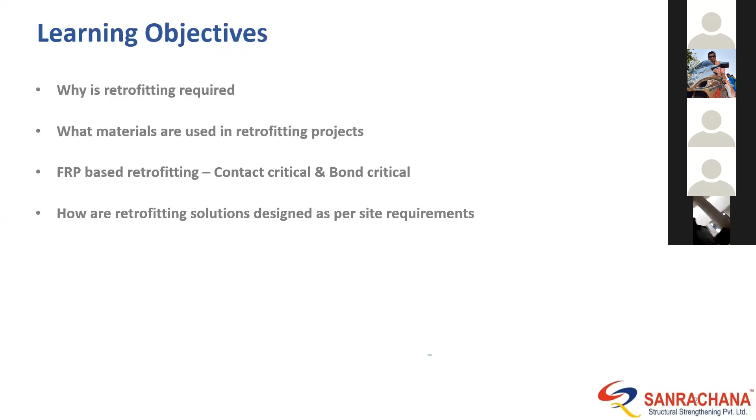So today I intend to present a short presentation about the latest trends in structural repairs and retrofitting which we follow in India. Let me start with the basic learning objectives that we intend through this presentation. We will learn why retrofitting is required, when I'm talking about structural retrofitting, and what materials are typically used in our retrofitting projects in India.

FRP-based retrofitting, we will learn about contact critical and bond critical applications, and how retrofitting solutions are designed for particular site requirements. We will look into some sample design calculations, as well as a few case studies of retrofitting projects. So let's jump directly into why retrofitting is required: change in use. What is change in use? When a structure was once built for a given purpose, and then the purpose of that building changes, like a residential part of a residential complex becoming a commercial setup.

So new additional loading, which was originally not intended to act on that particular structure, occurs when the purpose of the building is changing. In that case, the amount of loading that appears on the building changes, which it was not originally designed for. So in those cases, we need strengthening of the building - that is change in use. When new equipment is added or seismic retrofitting is required, as seismic load was not originally considered, but now we need to consider it to comply with design codes, etc.

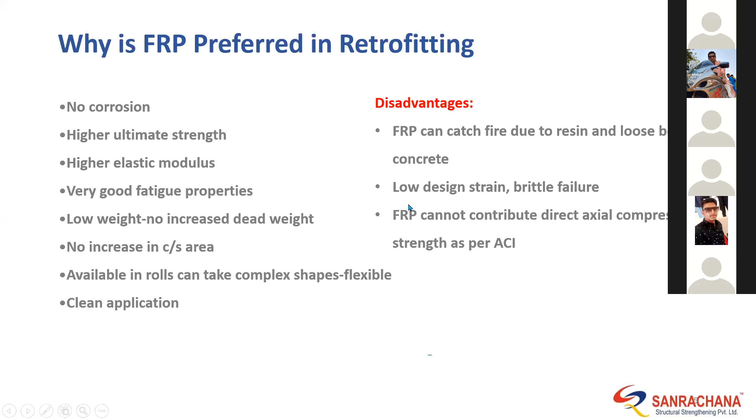We will look into this in detail in further slides. Basically, what is FRP made of? It has a fiber phase as well as a matrix phase.

What is a fiber phase? The fiber phase is the strength provider of FRP. It could be carbon, aramid, glass, Kevlar, boron, etc. There are pitch and PAN fibers in carbon fiber, and depending on whether we need high elastic modulus or high strength, you can select pitch or PAN.

Similarly with glass fiber. Now coming to the matrix phase, you have thermosetting resin and thermoplastic resin, which is also selected based on the type of application.

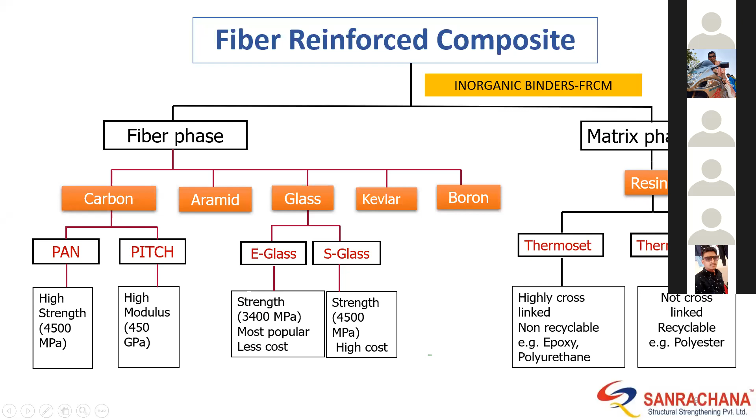Before we go into this, I would like to appear in the video so that I can show you a few things.

This is carbon fiber laminate. Okay, this is how it appears, with fibers oriented along one direction, more clear this way. Yeah, carbon fiber, and this is the thickness. You can see it is quite thin.

You have glass fiber laminate that looks like this. The color is so because of the epoxy used for setting. This is also glass fiber laminate, but with a different resin used at the factory curing stage. All of these have fibers oriented along one direction, so you can see the grain pattern along one direction. These are laminates.

Now there are carbon fibers, carbon fiber wrap that I was talking to you about. This is how it looks, basically like a fabric, very flexible. This has fibers oriented along one direction, so it's a UD fiber. We use it typically for shear strengthening, sometimes for even flexural strengthening. We will see how it is applied that way.

These are categorized based on their weight, as in the count of number of fibers, categorized based on its GSM capacity, that is grams per square meter. So the higher the GSM, the more fibers you get. This is basically a 600 GSM carbon fiber, and this is 900 GSM, which is a little bit thicker. You may not be able to see, but to feel it is thicker.

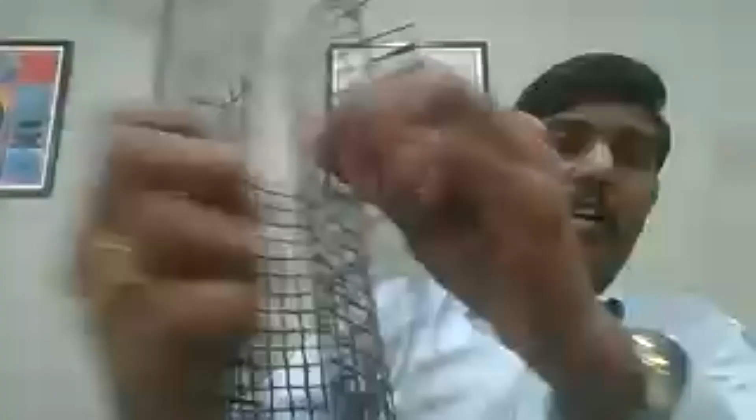And we also have certain things like this. This is used along with a special cementitious matrix. So this is a mesh of carbon fiber, bidirectional, with fibers in both directions. This is basically the strength provider of a product called FRCM, fiber reinforced cementitious matrix. You apply this onto the structure as per the design, and then fix it permanently using specially designed mortars.

We also have carbon fiber rods. This is how they look like, this is a carbon fiber rod, this is a glass fiber rod. Typically carbon fiber rods will be black in color because carbon is black in this fiber form, though of course diamond is also carbon, which is colorless. This is glass fiber, and the color can vary based on the epoxy used. These sound like ceramic. This is how it is.

So this is one typical project wherein we have done FRP strengthening.

This is the bridge which is across the river, and there are several piers which are deficient in shear. These are like 2.3 meter by 1.9 meter cross section, huge piers. You can see the size of the pier with respect to the 4-lane highway.

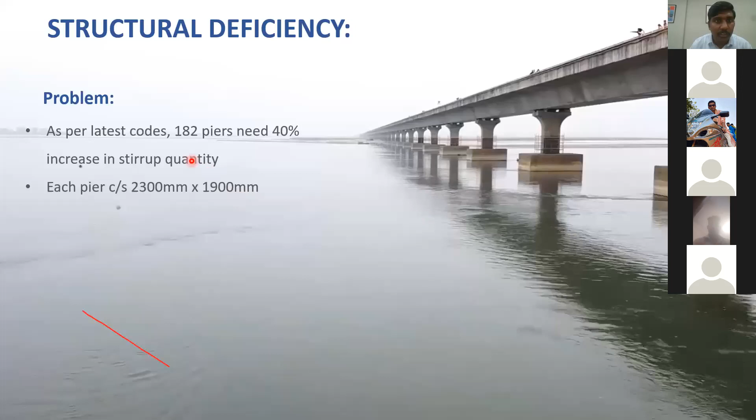This was initially not designed as per the seismic requirement, but later on we needed to comply with the seismic code. The builder was required to make it comply. Because of this, the cross-sectional area, the number of stirrups provided at the construction phase was less as compared to what is required as per the earthquake seismic code. So for that, we designed the carbon fiber wrapping for increasing the shear strength of the section.

So this is how we did it. You can see a roll of carbon fiber here. This equipment on the right is called a wet layup machine. You have an FRP wrap, an FRP roll here, it gets dipped into the epoxy resin, comes out fully saturated and becomes a saturated roll of FRP, and this goes into direct application. So that is a wet layup machine.

So basically the design is like this. You have the pier here, and just a second, let me erase this.

Okay, I cannot erase that. Okay, ignore this red line.

All right, so you have this column, you have this pier. Basically, we are increasing the shear strength. So we have this fiber, it is unidirectional, the fiber length. Along the length of the roll, you have the fibers. So this is the direction, green shows the direction of fibers.

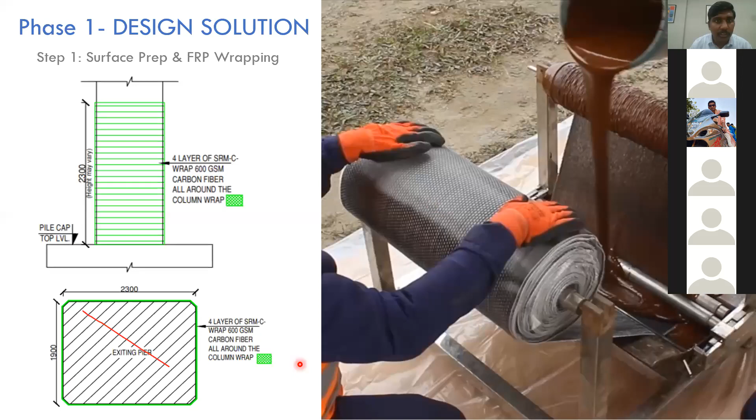carbon fiber all around the column, what you need to do is protect the FRP. Because it's a river, there are a lot of floating objects coming from the river, and it will directly come and impact the FRP, and it will damage the fibers. Then it is of no use. So for that,

you paste washed silica sand on top of the surface of the FRP like this. You can see, and this is for providing the grip. Grip into what? Because we are doing microconcreting. So we have a 40 thickness microconcrete, which you can see is being poured into the pier. So for the microconcrete to have a bond with the FRP that is inside, you applied the previous sand layer.

This is for shear strengthening of this project. And we had to see, basically, site execution is more difficult than how we assume.

In this particular site, the daylight hours are very limited. The temperature is low. The amount of rainfall that happens based on the rainy season, you need to plan your retrofitting activity, because once it starts raining, the height of water in the river will be quite high, and you would not be able to do any retrofitting on the pier because it will be submerged. So all this gave us ultimately a 2 month window in a year. We could only do the retrofitting work for 2 months in a year for this particular project.

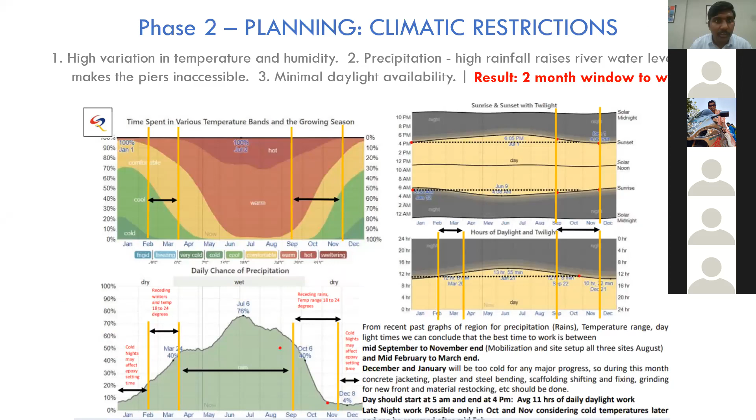So that was the planning. I told you, right, the piers will get submerged. So you cannot do FRP wrapping on a submerged river, right? So this is what it is.

Now, logistics. This particular project was running during the COVID times. So a lot of precautions needed to be taken, regular health checkup, everything. And it was in a very remote location, so shifting had to be done in these boats, which we have never done before this way.

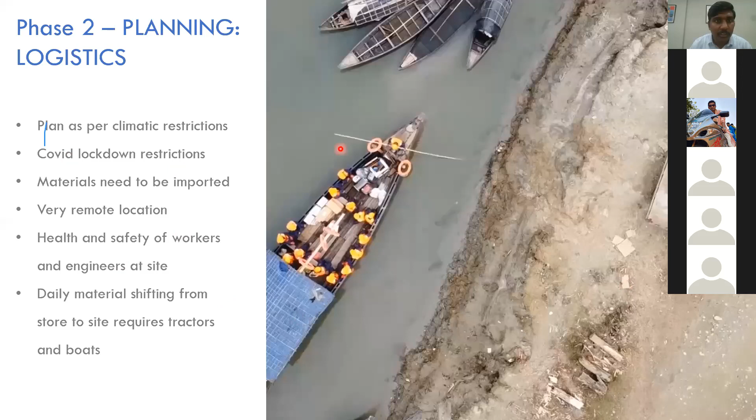Usually when retrofitting happens in the rivers, it will be dried up. But for this river, it's a perennial river, it's always having water in it, and we have to see where the airport is, where the roadways lead to, etc., so that we can shift our material. So remote locations, it's always very difficult.

And again, we need an experimental validation to show the clients, the owner of the bridge, that the FRP wrapping will provide the sufficient strength. So this is how the test setup was done.

Testing us, they wanted to correlate the increase in compressive strength due to FRP wrapping to select which kind of FRP, which company's FRP they wanted. So this is cylindrical. This test was done in one of the labs of a reputed college in Bangalore, in Bombay, and an RCC cylinder of the same grade of the pier was cast.

28 days ke baad, after 28 days, FRP wrapping was performed. These strain gauges were connected to that, and then LVDT is connected to it. And we tested several different samples like this in the same configuration, and also without FRP.

So this is a stress strain curve that you're seeing. Strain on the horizontal side and stress on the vertical side. So up to the strain of 0.01, the FRP wrapped concrete was performing, and it was going further. The curve was extending still further, and you can see that it was reaching M70, I think 70 MPa strength, 100 MPa strength, etc.

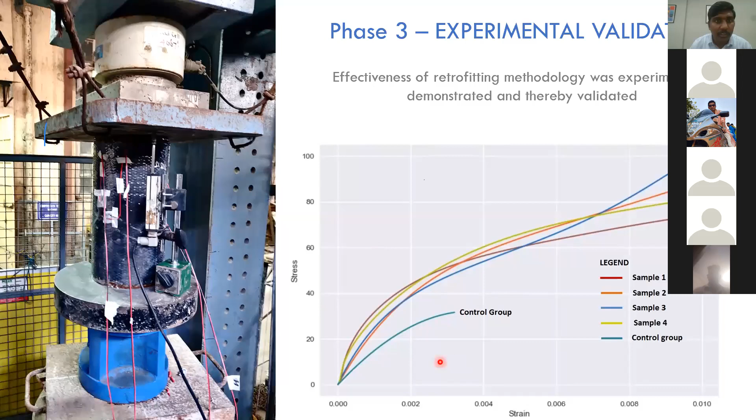And after this, you can see 250,000 square feet, so that is 23,000 square meters of FRP was used, which is a huge quantity used in this project.

And here I can show you a video of how it was done. Let me...

A land of breathtaking scenic beauty, plenteous floras and faunas, plantations, undulating plains, fertile valleys, and mighty waterways. Our retrofitting project is set in this beautiful landscape.

This elevated carriageway is an all-weather access passage across the unforgiving terrain beneath it. The carriageway is also a lifeline to the socio-economic development of several states.

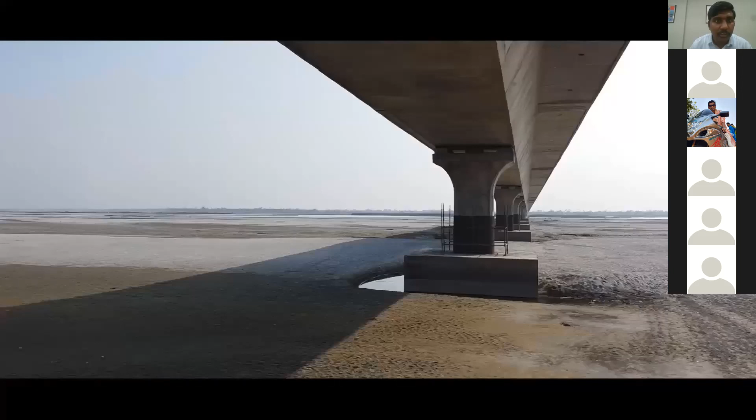However, a precautionary structural due diligence by the new owner revealed a red flag. The piers did not comply with the current seismic standards, and the asset location falls under earthquake zone 5, the most dangerous zone of all.

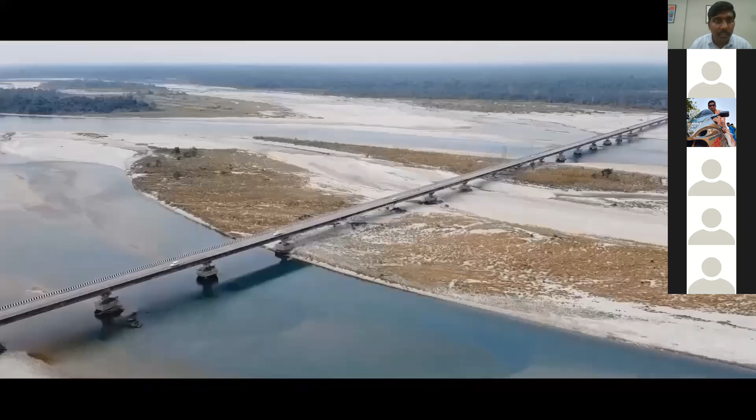Earthquakes have destroyed even our extraordinary structures. The future of this asset had to be secured from such eventualities. This task was awarded to Sanrachna.

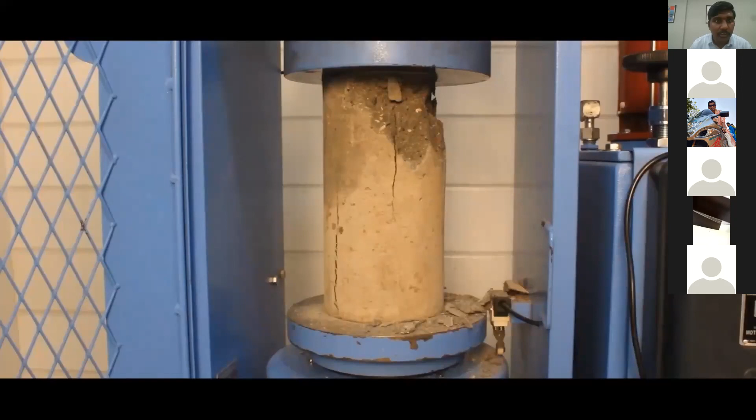At Sanrachna, our innovative structural design team and well-experienced site execution team work hand in hand to deliver custom-built turnkey solutions to your structural strengthening and repairing requirements with full load testing. In this project, we enhance the structural performance of the piers with carbon fiber confinement.

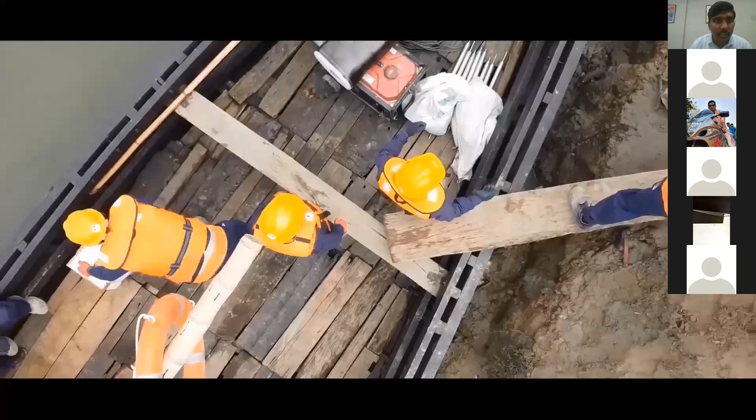Here we see carbon fiber being shifted to the piers of the bridge. Carbon fiber FRP is a space-age, high-performance material. Compared to traditional repair techniques, FRP gives tremendous speed of execution and imparts ductility for tackling seismic forces. 250,000 square feet of carbon fiber was applied in this project.

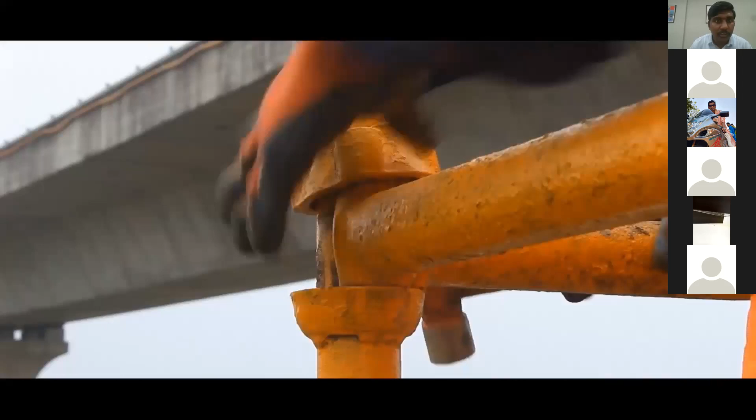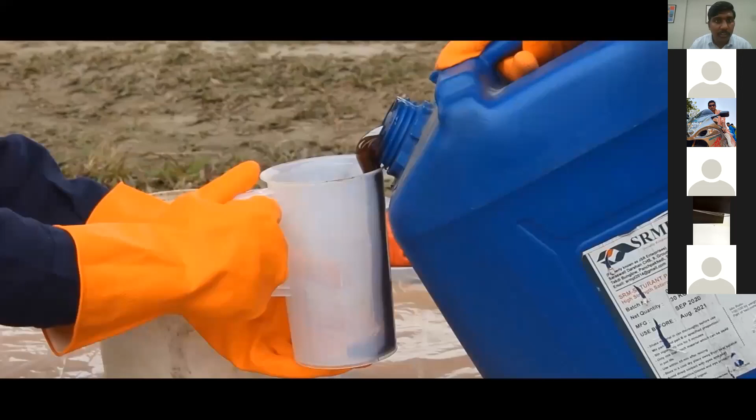After erection and checking of scaffolding, the workforce begins the surface preparation work, following which the primer and putty application is done. The saturant is then proportioned, mixed, and poured into the wet layup machine, where it saturates the carbon fiber sheet. Wet layup increases the productivity, pace, and quality.

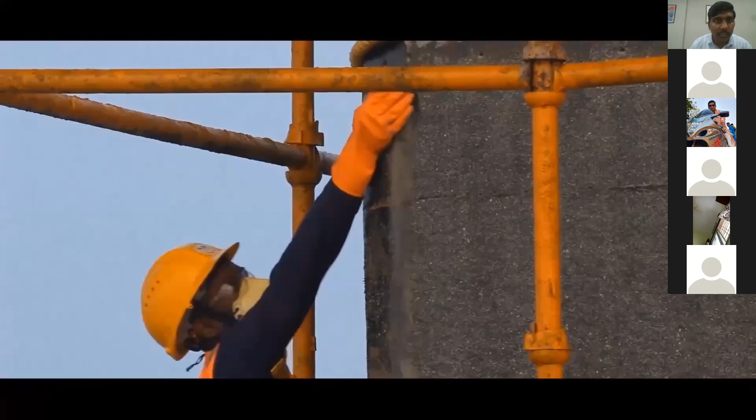Before doing the protective RCC jacketing, sand pasting is done to improve its bonding. Suspended silt and floating objects in the river constantly impact the piers. We must protect the FRP from erosion and damage.

Using the lightweight FRP formwork, a 40 mm thick micro-concrete jacket would be cast with nominal reinforcement. With rebars tied and formworks firmly supported, pouring can begin from the deck to the pier under gravity.

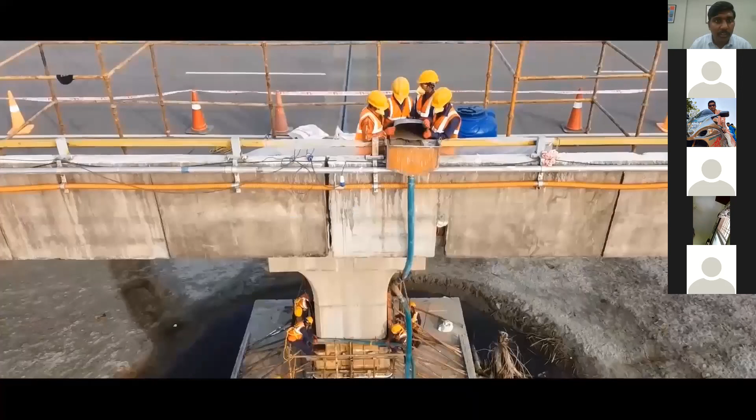And the process goes on. Time-bound completion means meticulous planning and coordination at site, based on temperature, the flow of river, rainfall, daylight hours, and resources.

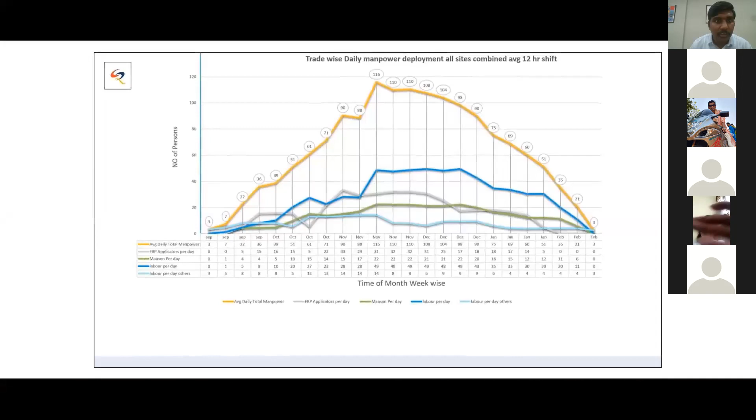Under strict safety measures of COVID-19, our focused workforce gracefully worked their way around the adversities, and with their dedication, the beautiful bridge is now revived and ready to face the challenges of the future. Sanrachana, leaders in structural retrofitting.

So basically, in that project, we had a deficiency in the shear strength of the piers. Stirrup quantity was less than what is required, and the solution we did was FRP wrapping using an epoxy-based saturant.

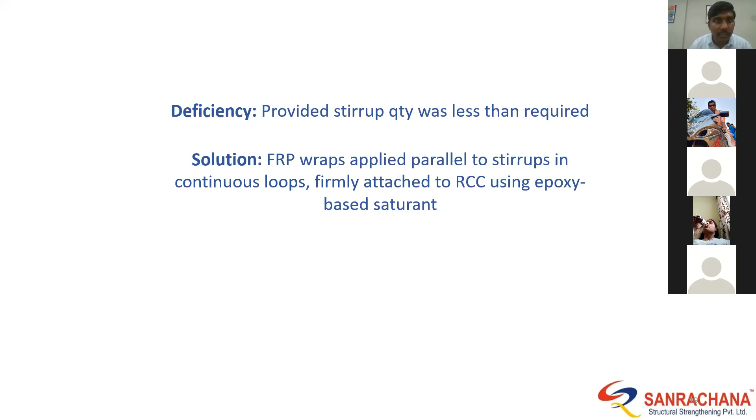Now the question arises: how important is this FRP to RCC bond? Because RCC is a weak member and FRP is the strength provider, it seems like the bond between this FRP and this RCC is through which all the strength transfer happens. Now, how important is this FRP RCC bond?

To answer that question, we need to know what is a bond critical and contact critical application. This is the textbook definition for bond critical application, wherein we require flexural and shear strengthening of beams, slabs, columns, or shear walls. We require this adhesive bond between the FRP and the concrete.

It seems like through common sense, this bond is quite important in all types of FRP applications. However, that's not the case. There are certain contact critical applications wherein the only critical element is the contact between the FRP and the concrete. There is no need of bond for this particular type of application, called contact critical application.

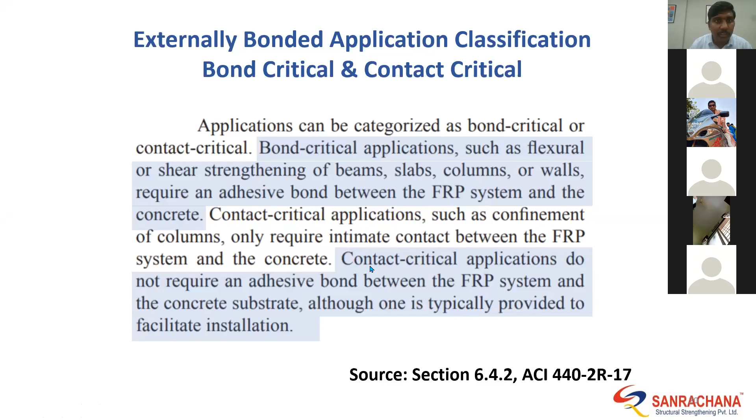What are they? This is an example of a contact critical application, where the only critical thing is the contact, not the bond.

So what happens is that the column, when it is under axial compression, has a little bit of lateral expansion, right?

You know about the Poisson's ratio and all. So because of the lateral expansion, these fibers that are in the hoop direction, along the circumferential direction, when under this lateral expansion of concrete, resist this lateral expansion. Because they are in a circle, and you are trying to make the circle larger by applying compression, those fibers resist this lateral expansion of concrete, and thereby increase the strength of the concrete.

Basically, if it is not a circular cross section, this hoop directional strengthening will not increase its compressive capacity much. However, it will increase its shear capacity. So in case of shear, the bond is critical. But if you are applying it for increasing compressive strength, then the bond is not critical. We only have to make sure that this contact remains intimate without any air bubbles in between.

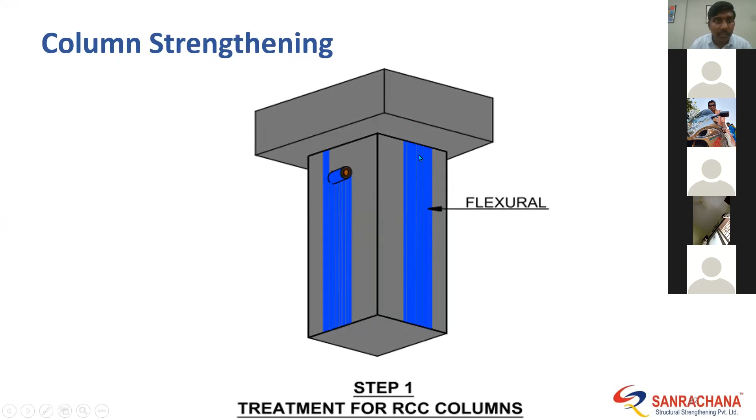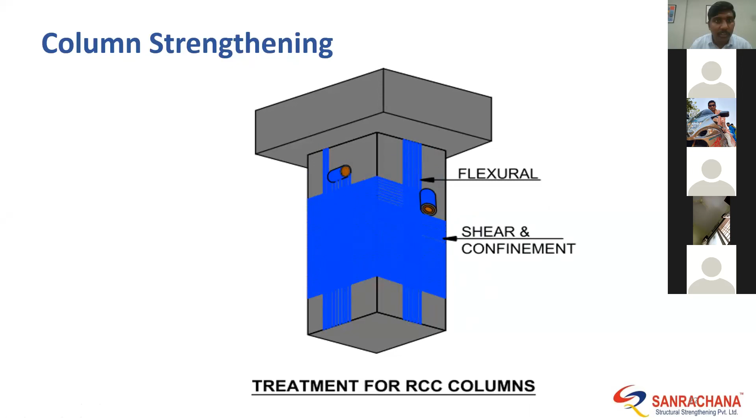So typically, this is how we do the column strengthening. When the column behaves as a beam, under flexure, combined axial force and moment, in that case it will act as a beam. So to resist the tension side of bending, you apply FRP as flexural reinforcement in the column, and then for shear requirement, this is how you apply it. Combined, this is how it will look: flexural and shear strengthening, or confinement. This is the FRP application direction as per theory, and this is how it is in practice as well.

So doing this increases the compressive strength, is what the code says, and it is proved as well in the previous graph that I showed you. In the experiment, you had seen, the higher M35 concrete was going up to M100.

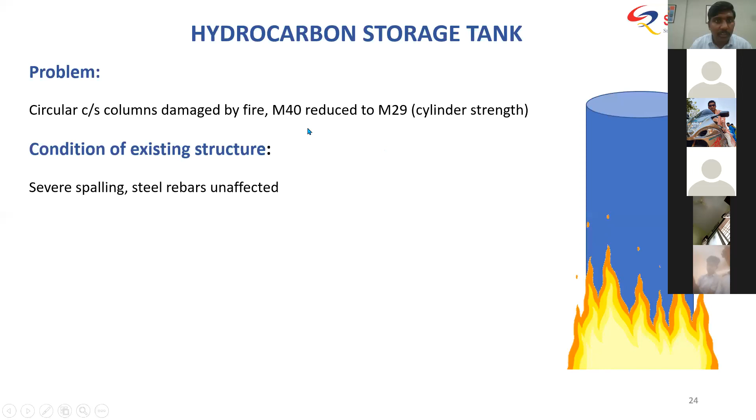They had done the non-destructive testing, which is called NDT. Based on the tests, ultimately the consultant found that the strength of steel rebars were not affected, because enough concrete cover was there at the time of design itself. So only the spalling of concrete had happened, and the core concrete strength had somewhat reduced. The least strength observed was M29. So on the safer side, we said all the columns are M29 currently, and we need to bring it to M40.

Restoration of concrete strength alone is sufficient in this particular case. So what do we do? Repair the column profile with a high strength adhesive putty, an M50 grade adhesive putty, which was applied to the spalled areas so that you regain the circular cross section. When there is spalling, the circular part gets aberrated, it doesn't stay smooth. So to smoothen it out and bring in proper cross section with a strong material, you use the high strength M50 grade adhesive putty, and then confine it with carbon fiber FRP.

This is the design calculation. I'm not going into the details of design, I'll just show you the specifics to make you understand the factors involved. There is CE, which is an environmental reduction factor. You basically reduce the strength of the FRP by this much - 4,900 MPa is the maximum ultimate fiber strength, which you reduce by a factor of 0.85 to reach 4,165.

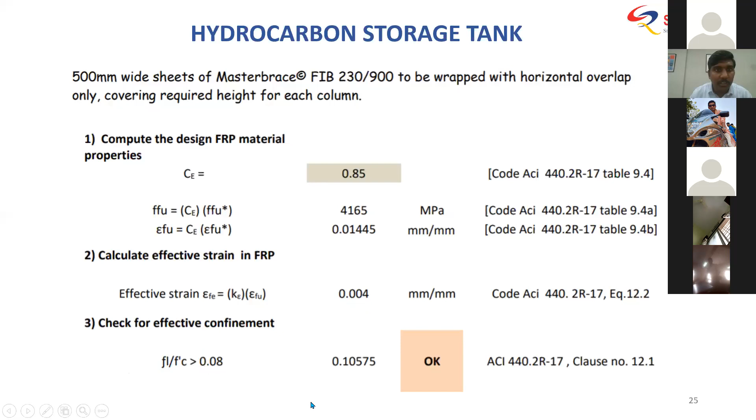Then you have kappa B, which is a shape factor - for circular columns it is 1. Epsilon CCU is the maximum compressive strain, which has to be limited below 0.01. As per our calculation, we were getting up to 0.0065, which is where we limit the FRP's strength providing capacity.

Then there's another reduction factor, psi F. For circular sections, we take it as 1. FCC dash is the ultimate strength of the wrapped concrete.

Now, after application of the FRP, how much is the compressive strength of concrete? We found that after 4 FRP wraps, it came up to 39.12 MPa from 29 MPa.

We submitted the calculation to the clients and they certified it. We don't really need to go up to 40 MPa - as per the structural analysis, 39 MPa is well enough, well within safety limits. That is how this particular project was designed, later approved, and went on to site application.

In the horizontal direction of application, the overlap required is calculated using a particular formula given in the ACI code, calculated as 300 mm overlap. So these are the design details - I'm just giving you a brief idea of how it is done.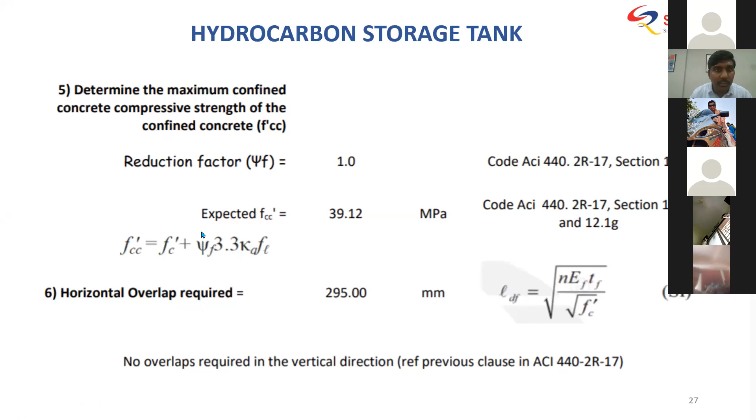So you can see how much factor of safety is there in the design of FRP. Your material is capable of much more, but you are only allowing 920 MPa - it's like 4 times. Why is there so much factor of safety? Because FRP ultimately is not a ductile material, which is why a high amount of reserve strength and factor of safety is required.

Here's a graph of stress versus strain of wrapped concrete, FRP strengthened concrete. This is one of the programs I wrote in Python to show the behavior of concrete in FRP wrapped and unwrapped conditions.

This is the bare concrete, the green curve you're seeing - that is M29, it barely reaches the M30 line, so M29 is the maximum strength of the existing concrete. After FRP wrapping, this blue curve is the stress strain performance curve, wherein, as discussed earlier, you have to restrict the strain to 0.0065 as per calculation, and at that point you get around 39 MPa, which was found sufficient for this particular project.

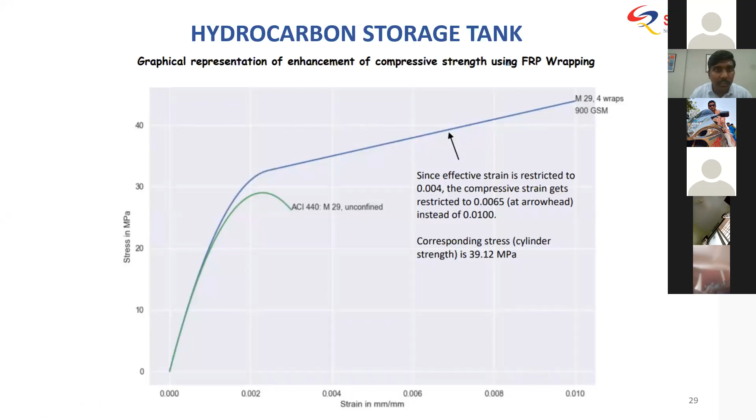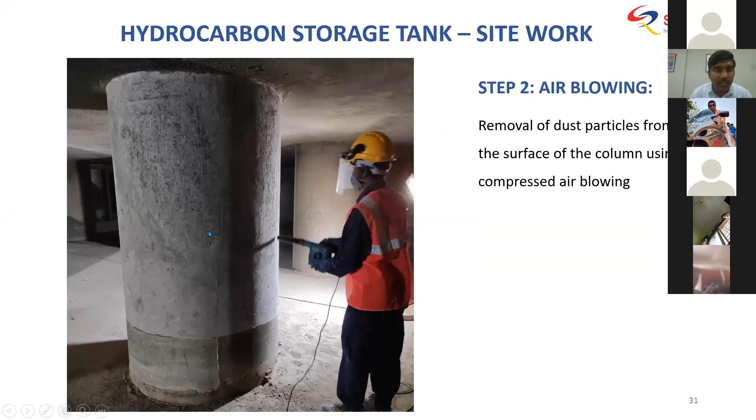Then you do air blowing so that there is no loose concrete powder or material sticking to the surface. Then putty is applied for smoothening - this is the same putty I talked about earlier, M50 grade. M50 is the compressive strength of this putty if you make it up.

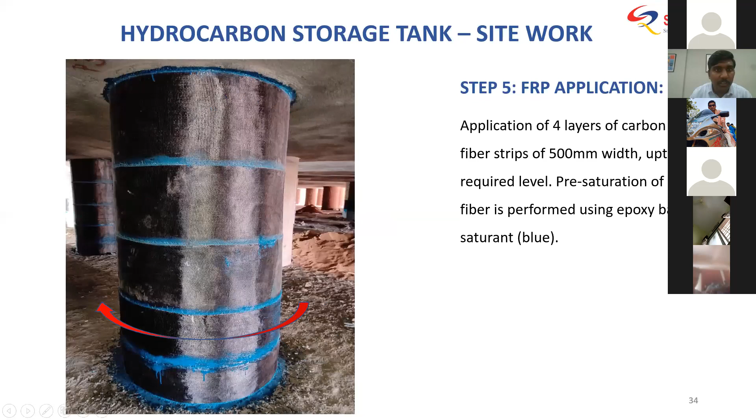So basically 4 layers as per design were applied. And then after that, the sand pasting that we discussed earlier gives it this appearance. So the surface is now rough and inorganic, so that further protection, like plastering, can be applied. Otherwise, on top of FRP, the mortar will not grip. That is why you need to do this sand pasting, and then you do the plastering.

Done, end of story. You do the curing of the column, which requires around 15 days, because the plastering and all need to be cured. So at the start of site execution, you do the planning for how much time is required. You calculate the number of labors required, and the amount of material to be delivered at this much amount of time. You do the project planning, and that's how you finish within a given amount of time.

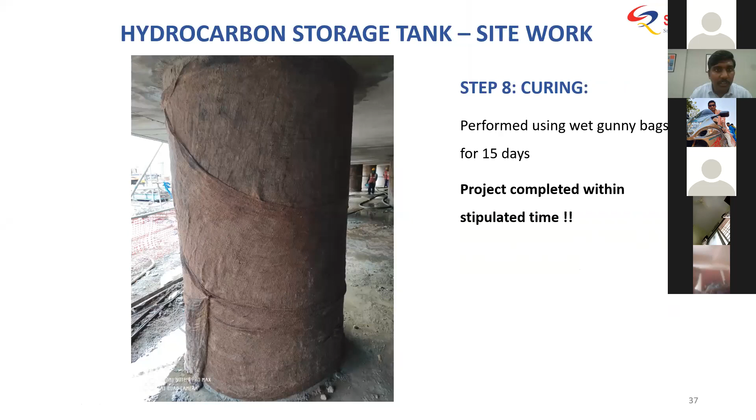So what if the compressive strength improvement through the FRP is not enough, wherein we had only a requirement of increase of 10 MPa in this particular case, but what if it is a quite high amount of increase in strength required? In that case, we go for a hybrid solution, for which I can show you how we typically do it. This is another video.

The columns of this RCC structure have a predefined load-carrying capacity. How do we strengthen these existing columns to take additional loads? Here is how.

Step 1. Scan the column using a GPR scanner to mark main reinforcements. Repeat the step for stirrups as well. The grid obtained would align with the actual steel bars.

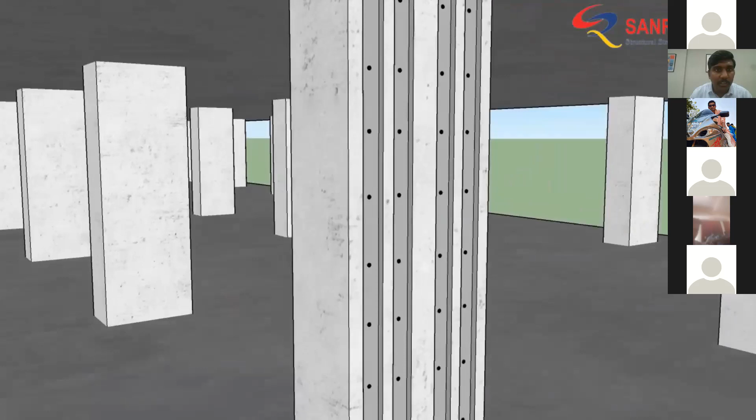Step 2. As per the retrofitting drawing, mark the location of FRP and high strength alloy plates and drill holes at both locations. Step 3. Cut grooves into the concrete as per the markings. Step 4. Perform surface grinding and anchor the threaded rods.

Step 5. Apply primer and SRM structural adhesive, and press the alloy plates into the groove. Tighten them firmly using nuts. While grinding, round the column edges to a 25 millimeter radius.

So that was one of my 3D modeling and animation things that I tried. I hope you liked it. And yeah, basically what we learned from that is you have a hybrid solution that you can design for compressive strength improvement of columns.

Why is it called a hybrid? Because it involves high strength alloy plates that you saw, which will be the hero of the retrofitting, the main compressive strength provider, and around which we provide the FRP wrapping. This is especially useful in case of rectangular cross sections and square cross section columns, because in that case hoop direction FRP will not contribute much compressive strength capacity. In addition to all that, you can provide vermiculite plastering, which is a gypsum based plaster.

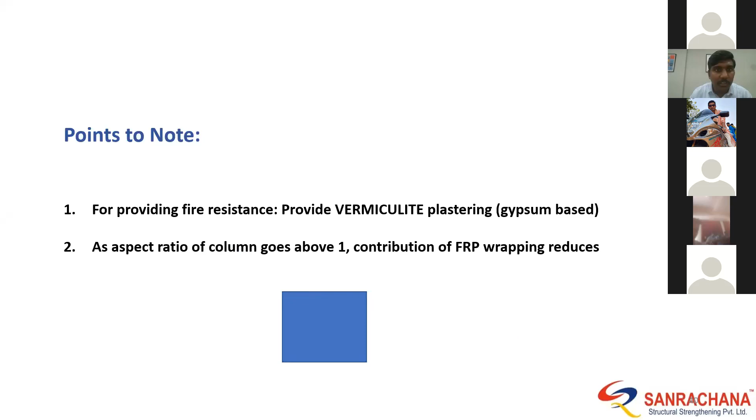Now we saw the different types of column strengthening. Now we go into the beams and slab strengthening, which are bond critical applications.

This blue rectangle is a side view of a beam, imagine it simply supported. A load is applied like this, and FRP is basically a tension reinforcement, so you provide it along the tension rebar, the main tension rebar. Bond critical applications like flexure and shear require the tensile strength of the substrate. What is substrate? The concrete, RCC. It should be at least 200 psi, pounds per square inch, which converts to 1.38 MPa. This is the standard requirement.

Let's go into this in a little detail how it works. When load is applied, beams bend, and that is how beams resist load. Beams resist the load by bending. At the time of bending, above the neutral axis you get compression, where concrete is really good in compression. In the bottom you have tension, this for a simply supported beam, like in the middle. In the tension phase, since concrete is not so strong in tension, it will create cracks there, and that is why we provide main reinforcement along this direction, because steel is the ductile material in RCC.

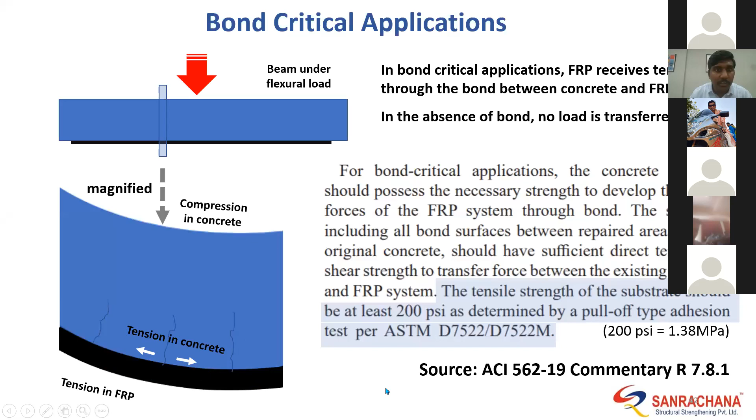This is again how we apply it. Imagine a simply supported beam, your tension face is in the bottom, the fiber has to be along the main reinforcement. Neutral axis will be somewhere in the middle, so this is in the tension phase. For shear strengthening of the beams, you typically have a slab on top, so you get three sides. Along the stirrups, your fibers of the shear strengthening follow the direction of the stirrups. Combined, it will look like this. This is the typical scheme of beam strengthening.

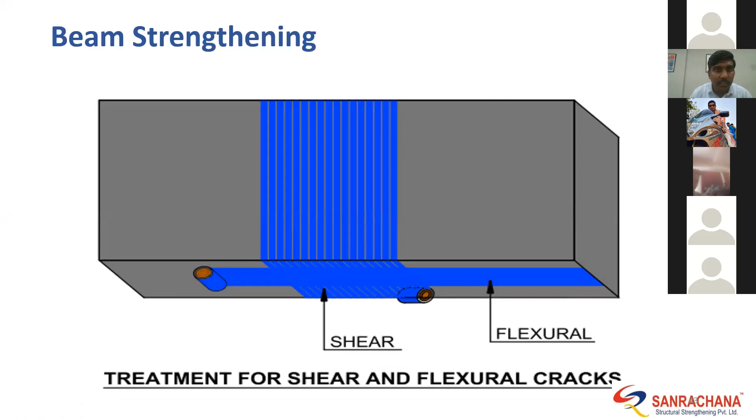For slabs, you have the main direction along this direction. This is where the positive moment happens, so sagging happens here. If it's a continuous slab, you have negative moment on top, so tension will be on top in that case, wherein you provide the FRP on top, on the negative hogging phase. Ultimately, think of it this way: wherever there is tension, you remove the loading, apply FRP, and then put the loading back on, and it will work.

So two-way slab strengthening, you have to do it in both directions, because two-way slabs are designed to take bending in both directions.

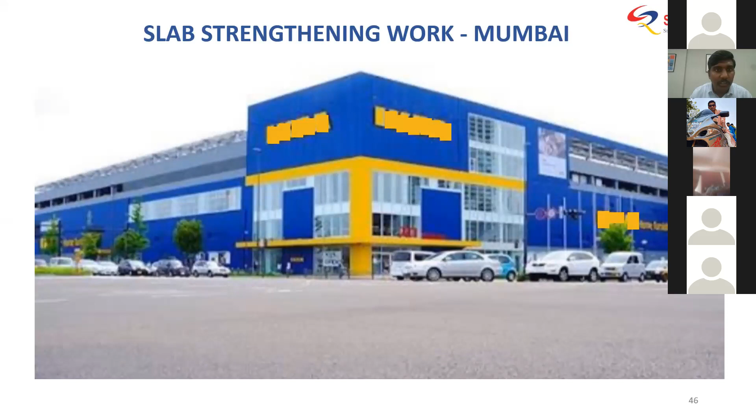That's it. Another case study, a very international company - we have a clause wherein we cannot disclose the name of the company, but I hope you can understand which company it is. Here we required some strengthening of slabs, since certain unloading and loading processes happen in this industrial building. Beyond the design capacity of the slab, we needed to increase the strength of the slab.

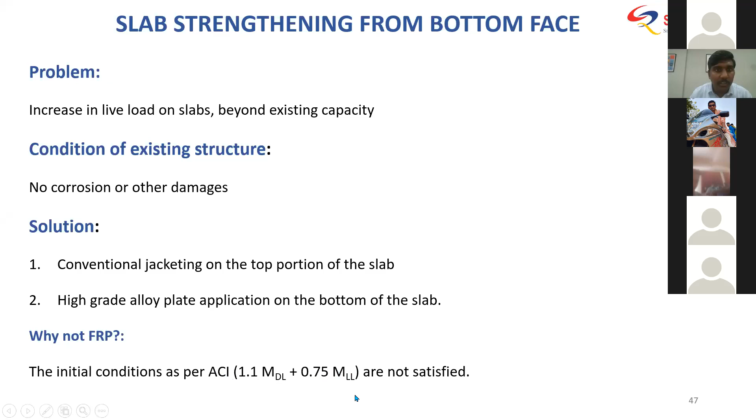For this, there was no corrosion, it was a fresh building, no other damages to the concrete. We had to do conventional jacketing on the top portion of the slab, in the hogging phase, and we provided high strength alloy plates on the bottom of the slab. You're wondering why we didn't do FRP? We did not use FRP because there is a clause in ACI saying that the existing concrete must be safe for 1.1 times the moment due to the new dead load, and 0.75 times the moment due to the increased live load, which was not satisfied.

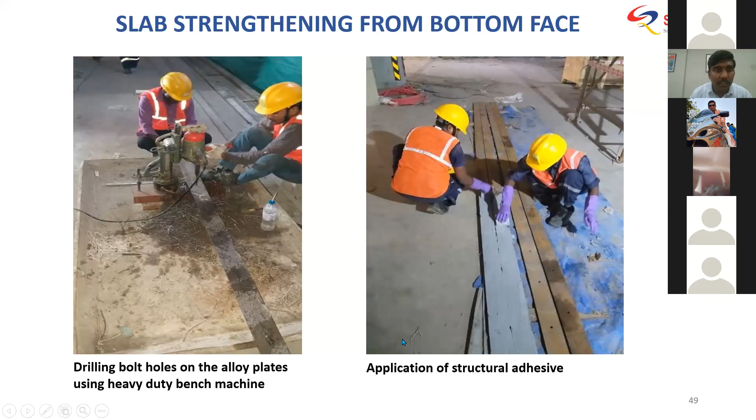Based on the scan locations and rebar locations, you make holes wherever needed for chemical anchorage. Then you apply the structural adhesive, an M50 grade adhesive, and stick these alloy plates onto the slab bottom surface, anchoring it using chemical anchor bolts.

Then on top of the slab, we went for conventional strengthening. The cover concrete was removed. We marked the grid coordinates, and then the top cover of the concrete was removed.

Just above the existing top rebar, we provided a new mat of RC steel rebar, Fe 500 grade. Just putting this mat there is not enough - it has to be mechanically bonded to the existing concrete. How do we do that? By using L-shaped shear keys.

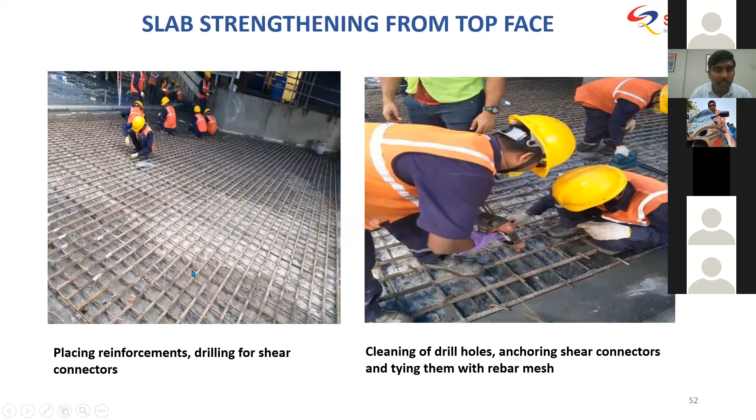Then you place these L-shaped rebars. You can see on the left side picture there are some L-shaped rebars, which will basically anchor the rebar mat onto the existing part. This anchorage of the L-shaped bar happens through commercial chemical anchors - there are many companies that manufacture it.

Once the rebar is done, you pour the concrete, and then this sets with the concrete. You need to leave it for curing, and then it attains strength - the top strengthening is complete for the slab, and bottom strengthening was done by steel plate anchoring.

Slab is now strong. Now we come to the joint between the slab and the column. If you increase the loading on the slab, and if the joint of the column and slab is not designed to handle that much load, then ultimately the column is going to punch through the slab - if you're aware of punching shear. That kind of failure is obviously not desired.

So what do we do? We anchor rebars between the column and the slab, and we provide something called a column capital. Here again the same mechanism: you scan and find where the rebars are, mark them, and do the drills onto the slab and column to find out where the rebar has to be anchored.

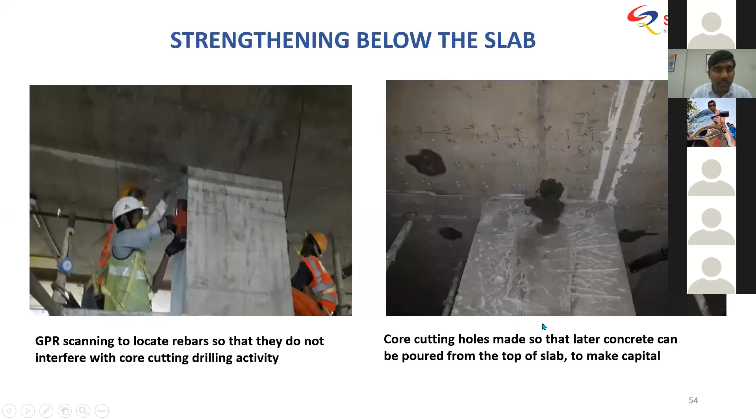Ultimately you need this rebar cage. Now the rebar is ready - how do you pour the concrete? This entire portion is ultimately going to be a capital, so you need to pour concrete onto it. How do you pour it? There is always going to be a gap between this concrete and the top.

So you make core cuttings in the concrete slab. From the top of the slab, you put the coring machine and cut cylindrical holes through this - these holes you can see, these black patches, are actually through and through holes. Then you put the formwork, pour concrete from the top of the slab so it pours down through these holes made earlier. After curing and shuttering, your concrete capital is ready, done.

That was the entire strengthening process we did for this particular project: slab strengthening from the top and bottom, and enhancing the column to slab joint by preparing a capital.

All right, now, oh yeah, I missed out one point - it was done using microconcrete. Microconcrete has 10mm down aggregate, as I told earlier - addition of 10mm down aggregate, so you increase the amount of aggregate by adding extra.

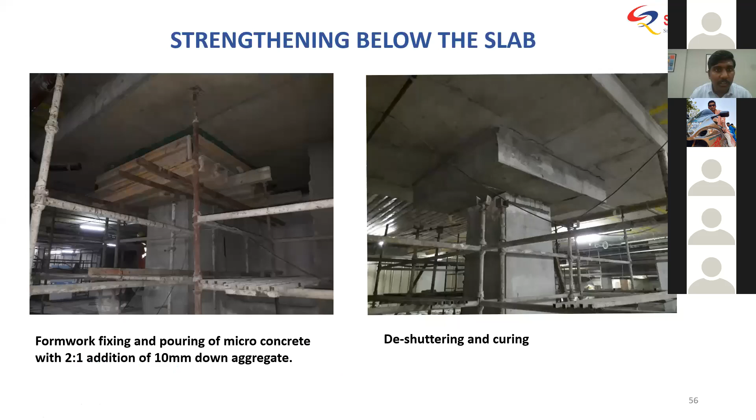Now this is a bridge in Kolkata - it's a bowstring bridge, basically quite a wide bridge. Now what happened is, I can show you a video directly - you can see it from the video.

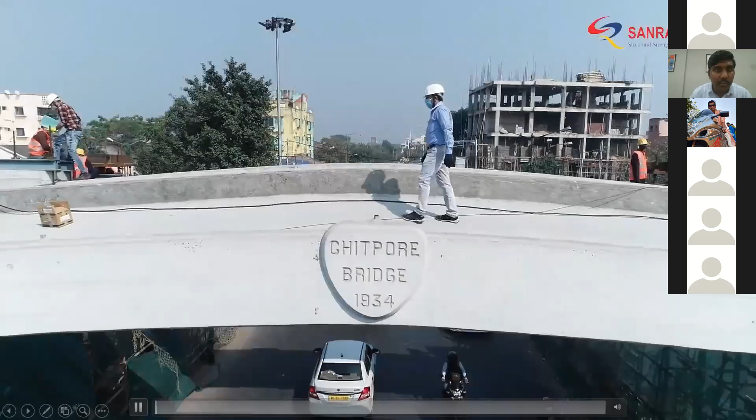The top part is in the shape of a bow or arch, and the string is the bottom part, the tension member, which keeps the bow in position. The beauty of this structure is there will be no horizontal force onto the foundations.

In the inspection conducted by Kolkata Metropolitan Development Authority, or KMDA, this 24-meter long bowstring bridge found itself among the list of vulnerable bridges and flyovers.

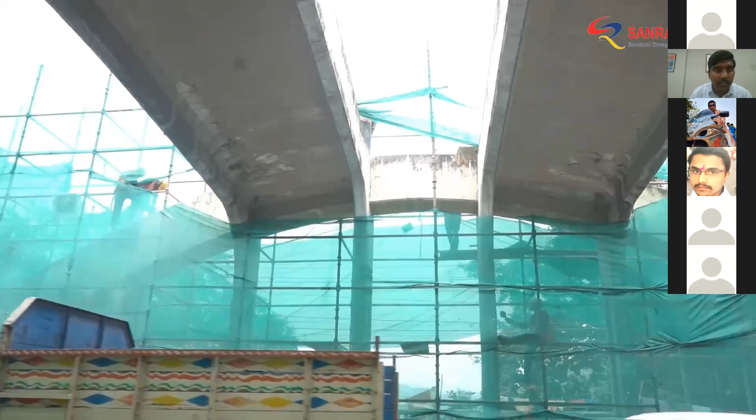Intervention was inevitable. In August 2019, LASA was awarded the consultancy services of Chitpore Bridge. The state of the bridge was surveyed, and non-destructive tests were performed. The seemingly healthy bridge revealed a very active and prominent corrosion in selected areas.

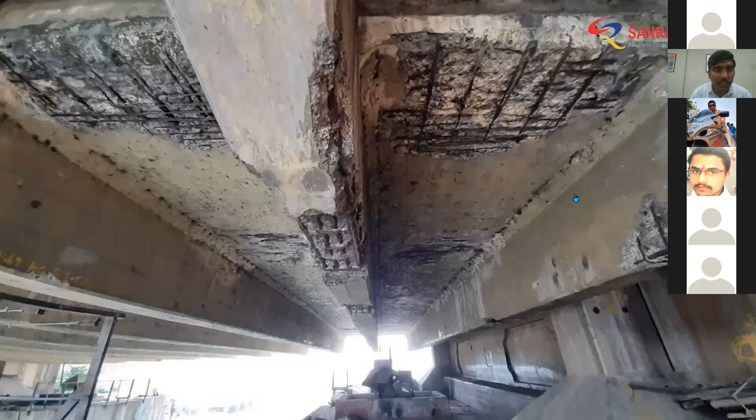In the vertical hangers, soffit of the deck slab and cross beams, main steel reinforcements had lost their diameter at several locations. In short, the sectional strength of structural members was being severed by corrosion day after day.

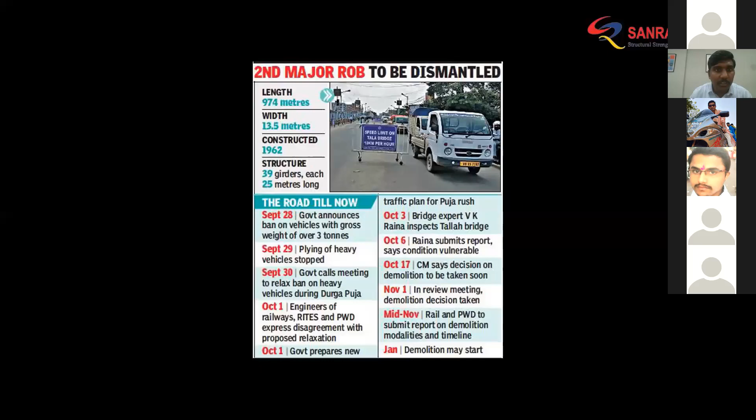Adding to its woes, the neighboring Tallah Bridge would be closed down and dismantled soon, sending substantial traffic to Chitpore Bridge. To prevent a catastrophe, the immediate repair and strengthening of the hangers was absolutely necessary, and it had to be done fast with due diligence.

That was when Sanrachna came to the rescue. Sanrachna has decades of expertise in structural retrofitting and has undertaken countless bridge repair and strengthening projects.

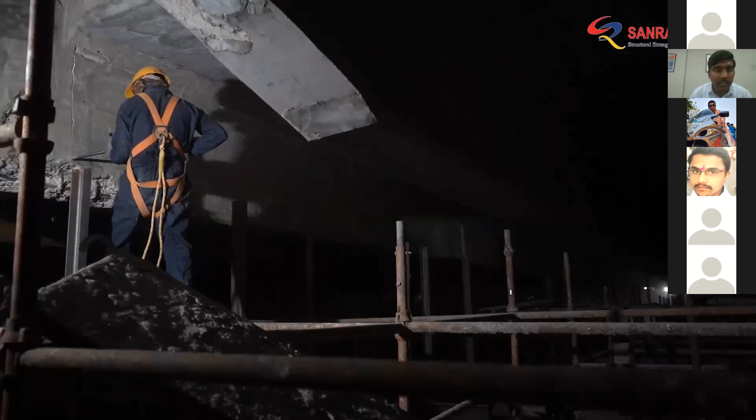In Chitpore, we started off with shot blasting for a clear picture of the underlying structural distresses. Delamination and spalling were detected and removed with hammer and chisel. The exposed rebars of the hangers were treated for corrosion, and the section was rebuilt with high-strength microconcrete.

The underside of the bridge was made accessible with platforms supported on structural steel sections. Shot blasting was carried out, the delaminated concrete was removed, and pressure grouting was conducted to improve the microstructure of the beams and deck slab. Exposed bars were treated for corrosion, and sections were rebuilt appropriately.

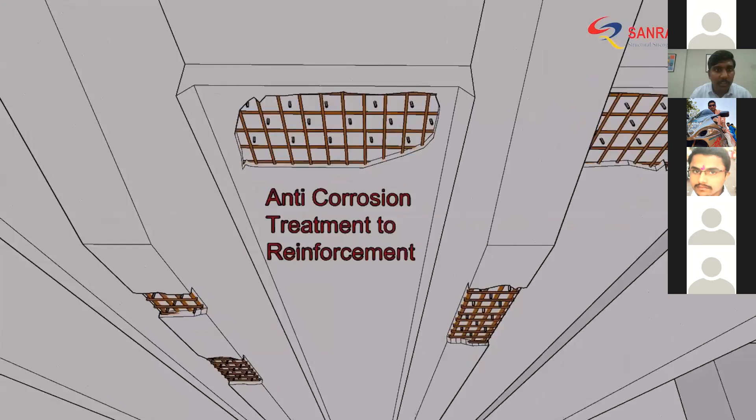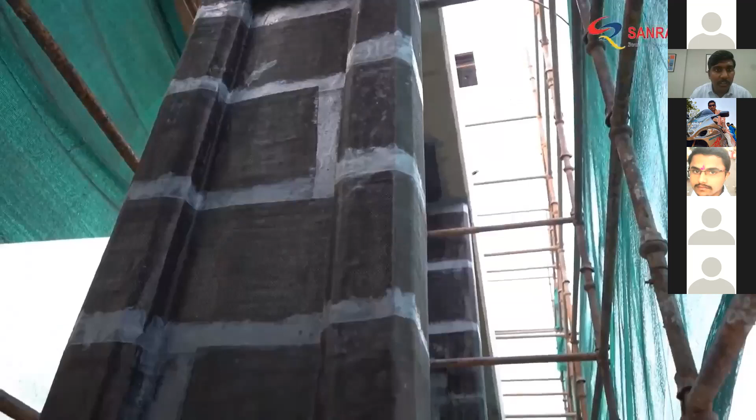With the basic repairs done, we turned to strengthening. Ultra high-strength carbon fiber sheet SRM CRAB UT400 was applied for strengthening the hangers from all angles. The same SRM CRAB UT400 was used on the underside of the bridge for enhancing the strength of the deck slab and cross beams. On top, the base of the hangers were armored with a 1.2 meter tall covering block.

What the trained workforce of Sanrachna are doing is the process of transferring the load from the vertical concrete members, reinforced concrete members, onto a set of four metal bars, which you can see are threaded, and metal bars can carry a lot of tension.

After observing the damage to the verticals, the bridge committee took a decision that the only way of making this bridge continue to serve is to make the concrete verticals defunct, and instead introduce vertical tension bars for carrying the entire load from the concrete onto the steel bars.

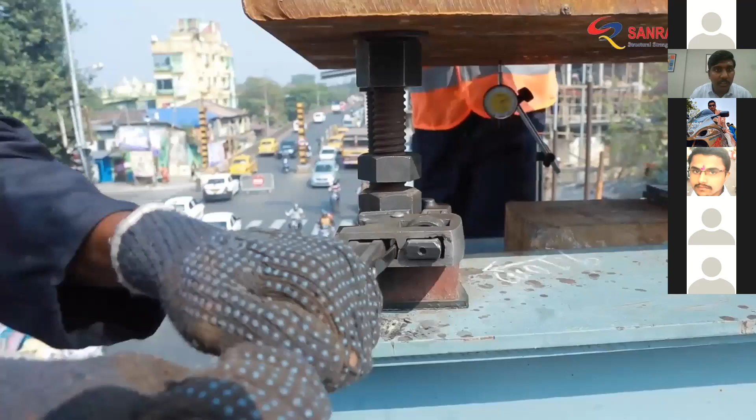By retightening the nut, the post-tensioning was permanently transferred to the hanger, making it safe for a lifetime. With the application of protective coatings on the bridge, our work was complete. Historic infrastructure rendered safe for generations to come. Sanrachana, leaders in structural retrofitting.

Okay, so I hope I have covered most of the basics of structural strengthening. We discussed concrete RCC strengthening in columns, compressive strength improvement, and we looked into the beams and slabs as well.

We studied and looked into the design aspect of FRP, like the design calculations we just went through, and you saw how a project is basically executed for FRP strengthening. So now let's conclude quickly and open the forum for questions.

So basically, for flexure, the solutions we provide are usually FRP laminates and high-strength alloy strips with FRP wrapping, because usually when there is a flexure requirement in beams, there is always some shear requirement as well. Ultimately your original design is an economical design, so cut-to-cut, the amount of rebar will be there for flexure as well as shear. So when there is additional loading, you will require strengthening in flexure as well as in the shear of a beam or in flat slabs.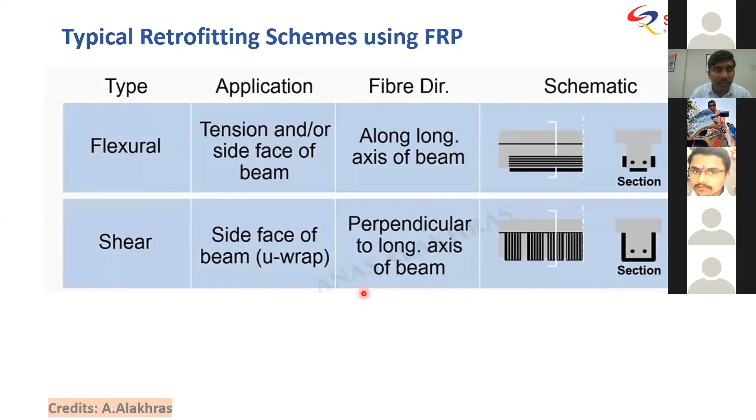Now confinement for columns. For circular cross section columns, you provide FRP along the direction of stirrups, so that it confines the column and prevents its lateral expansion, resisting it so that its compressive strength is increased.

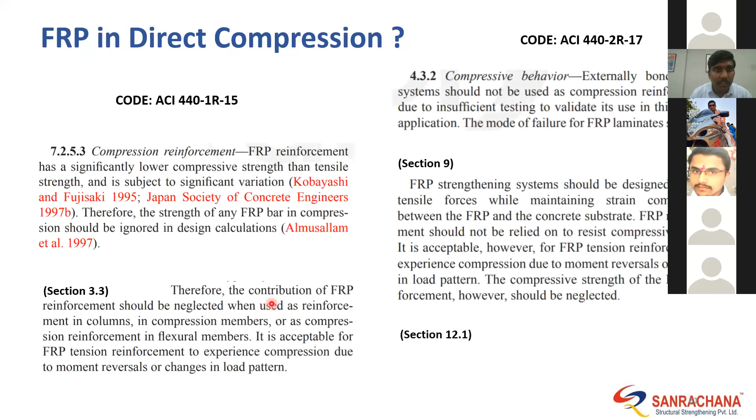If you go through the ACI code, in many places it basically tells you, through different clippings and ways, please don't use FRP in direct axial compression. You can go through the codes for further understanding of this.

Certain design practices we maintain in practice: you don't say that X amount of FRP is equivalent to Y amount of RCC, or Y amount of steel reinforcement. That's not a good practice, because people misinterpret it, and it leads to bad structural performance ultimately.

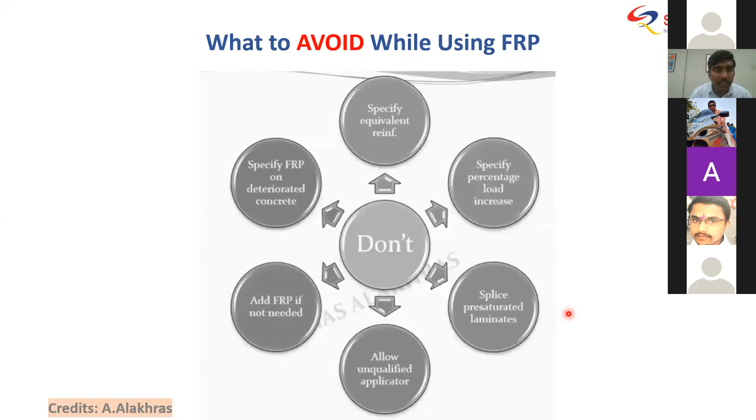And then there's the splice issue. When I showed you laminates, they are factory cured and come ready for attachment to the RCC. You should not give splicing on it - lapping for laminates is not recommended at all. So if you require, say, a 20-meter long laminate for a girder, you manufacture it in 20-meter length, then cut it as per requirement and apply it directly. You cannot splice it - you can't bring one 10-meter and one 11-meter piece and give a 1-meter lapping on site. That's a wrong practice. FRP fiber continuity is the main point - fiber continuity is what provides the strength, so don't cut the fibers.

On deteriorated or dilapidated concrete surfaces, you cannot apply FRP, because the concrete has to be solid.

These are the basic practices that we follow - in India also we follow all this. If the moment requirement is greater than 40% of the existing structure's strength, if the shear strength requirement is more than 50% of the existing, or the axial strength requirement is more than 20% of the existing - when these moment, shear, and axial requirements exceed this much, you go for primary measures like sectional enlargement or providing a steel section. Don't go for FRP beyond this much increase requirement, because FRP is always a supplementary reinforcement.

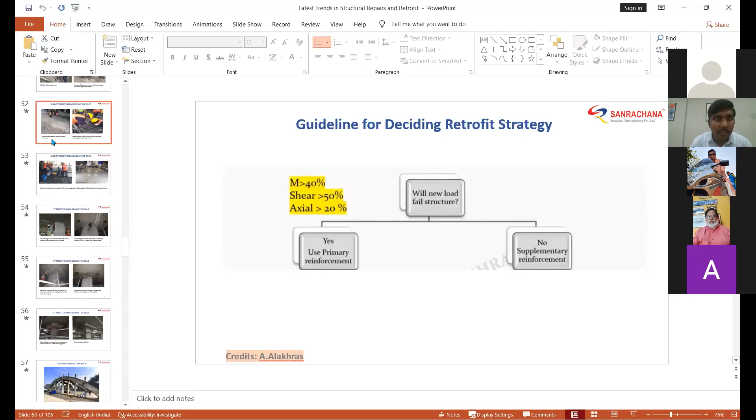Sir has elaborated many things in this webinar: what is retrofitting, material use, various techniques, structural deficiency, various design solutions, FRP and RCC bonds, and also discussed the problems of many structures and the respective solutions, illustrated with photos and videos. He also discussed various sites of retrofitting and strengthening. With his detailed presentation, all participants might have explored the wide scope in this field.

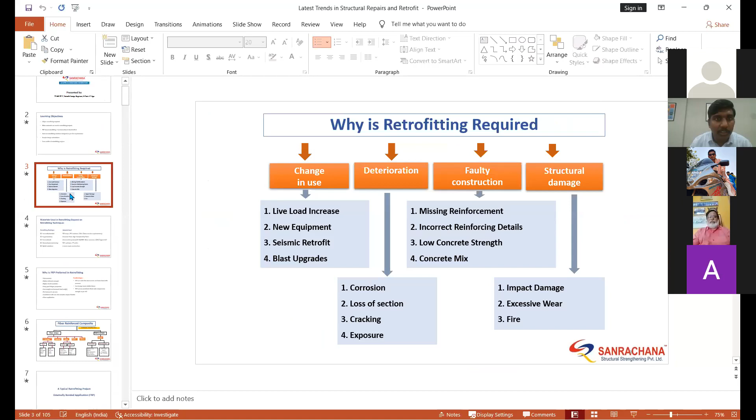Now I request all participants to post their questions in the chat box. Sir, tell us about the safety measures in this.

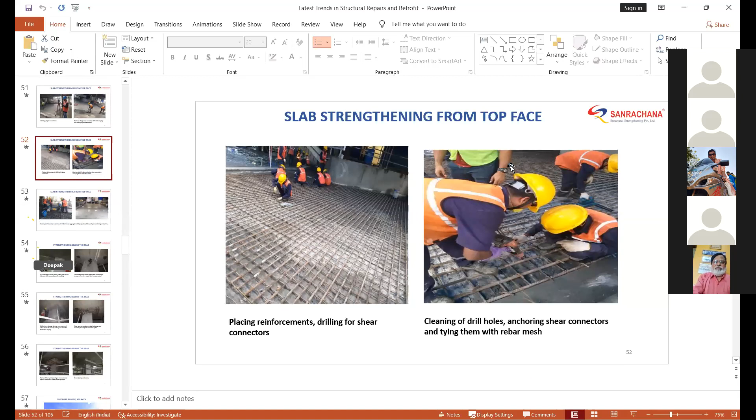What they do is visit the site, and before the works begin, all our engineers as well as all our workmen are assembled at one place. They explain to them the safety hazards and health hazards possible at this particular site based on the type of application of materials, the purpose of the building, what kind of cargo or things come onto the site, if there is any production of cut fibers, asbestos, or inhalation hazards. If grinding is required, what precautions need to be taken? So for each activity, we have a set of personal protective equipment.

If you're doing grinding, you have to wear safety goggles for eye protection, earplugs for ear protection, and a nose mask. Even before COVID times, the nose mask was required for grinding, wherein fiber cutting, FRP cutting, as well as concrete grinding - these measures have to be taken.

Sir, is there any specific Indian standard code for this, for safety, confined space, or are we not aware of that? Actually, we have one for jacketing, RCC jacketing - we have an Indian code for RCC jacketing. But typically, for design purposes, we always follow the tried and tested FRP design code, which is ACI 440. We also have a European Union code called Euro code - they have FIB. FIB 90 is the European code.

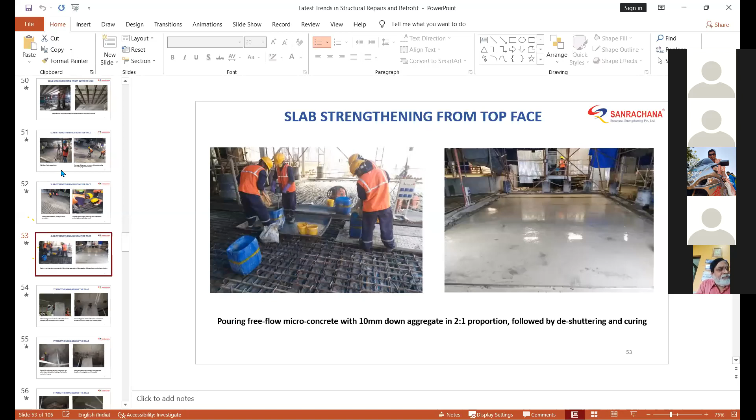You have to purchase it, it's around 10,000 Indian rupees. We have that with us. You can design based on that. But ultimately, the design that we do for our commercial purposes, we always follow the ACI, American Concrete Institute. ACI 440.2R-17 is the code - I have mentioned it somewhere, right? Yes, you have noted ACI.

440.2R-17. How costly is this procedure? See, I am actually not the right person to talk about this because I am a design engineer, but I can tell you a few things about costing.

The FRP used in this particular project required 4 layers of wrapping of 600 GSM carbon fiber. We also have places where you require only 1 layer of wrapping of 300 GSM. It's all based on the amount of loading as well as the dimension of the column cross section. So the expenditure required for wrapping can vary substantially between projects. The same goes for strengthening using carbon laminates.

Or if you are doing jacketing, RCC jacketing, the material that you use, like how much thickness of jacketing is required, based on that the costing can change per square meter. How much, what is the design strength of the jacket? Like if you are using micro concrete for jacketing, or is the thickness large enough so that you can pour the regular RMC concrete, in that case the costing will be lesser. So based on a lot of parameters, the costing can vary.

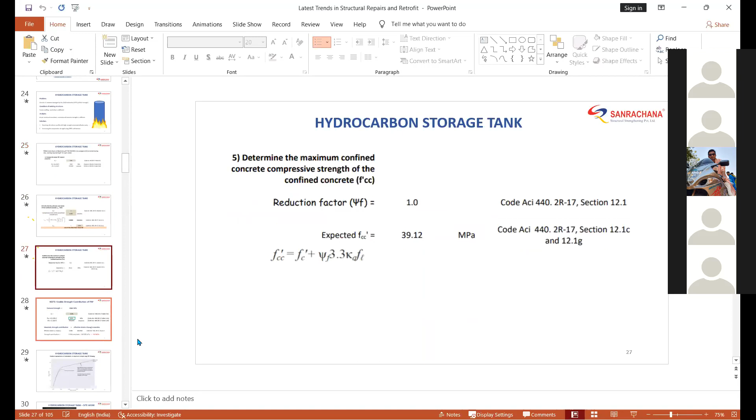So it will come out as the number of wraps that you will need to provide. More number of wraps means more thickness. It's a design procedure, it's a well-established procedure, so you can do that. That's how you determine the FRP thickness.

Indian code, we discussed that. In what conditions should we use this application? Are you asking about FRP application?

For FRP application, the surface has to be structurally sound. So for applying FRP, be it laminate or FRP wrap, your surface needs to be structurally firm. It should not be flaky, there should not be delamination. If the reinforcement inside is under corrosion, then the surface of RCC will be flaky.

So it will start peeling off, which will not work properly. In that case, we chip off the loose concrete and reach the parent concrete, the hard concrete, and on that hard concrete we do the profiling, applying micro concrete or polymer modified mortar, which are M40, M50 strength cement-based materials. We make the structure firm and hard, and there should not be any moisture on the surface at the time of FRP application.